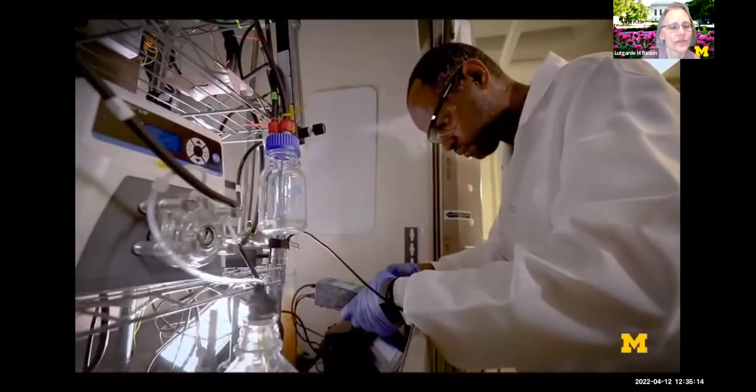We would release it back out to the environment. We started to realize that a lot of those wastes that we would release have valuable resources in them. Civil engineers and environmental engineers were designing a lot of those flows, and I think we have a big role to play in how we might continue to shift the mindset and think about the future of what those flows might look like.

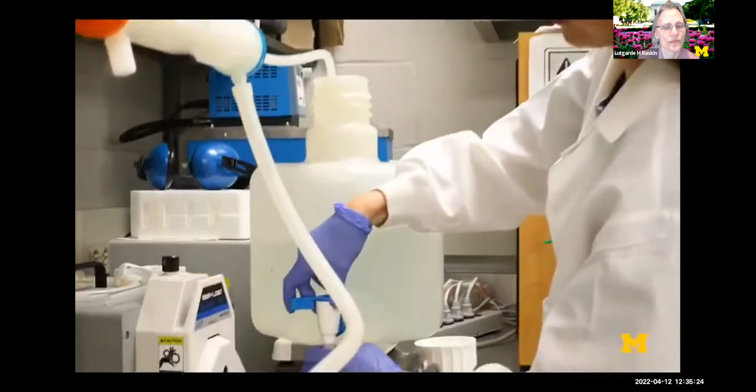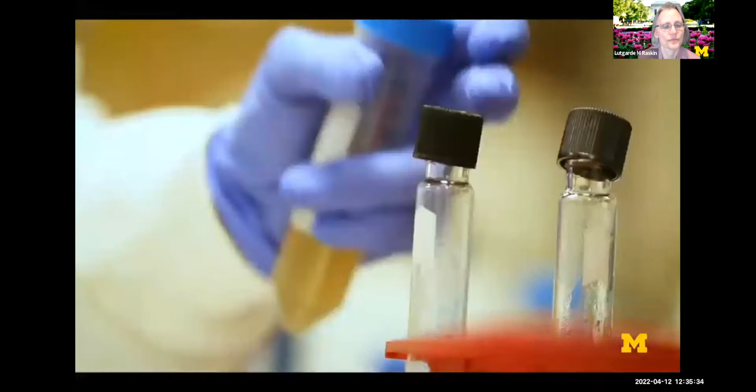One of the things I think we're doing that's really special is separating our wastewater right at the source, right at the toilet. The reason we're doing that is we can pull the nitrogen and the phosphorus out much easier before it's diluted in the wastewater, and then convert that nitrogen and phosphorus into really valuable fertilizer products.

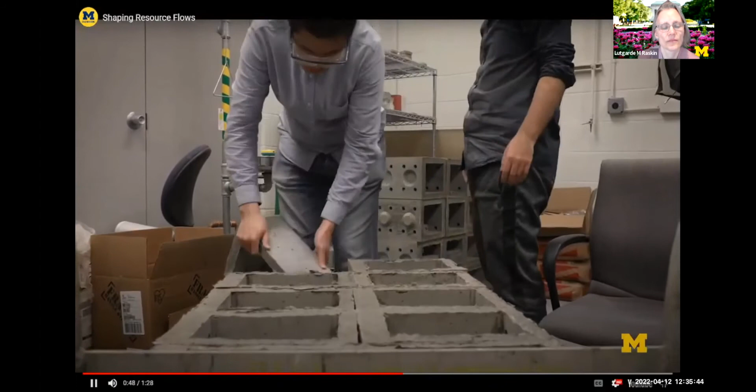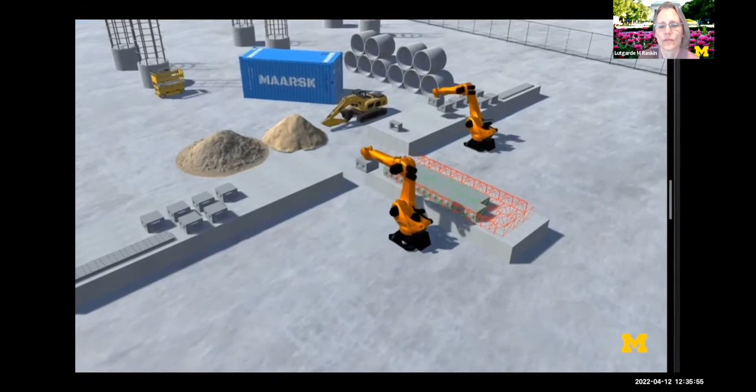Researchers in CEE are building RECO blocks. These are blocks built out of materials from carbon that's been sequestered, used to build structures. And then when the structures are done, rather than landfilling the material when we tear it down, we take those blocks and use them in new buildings, shaping the flows of these resources rather than a linear flow, making this a cyclical flow.

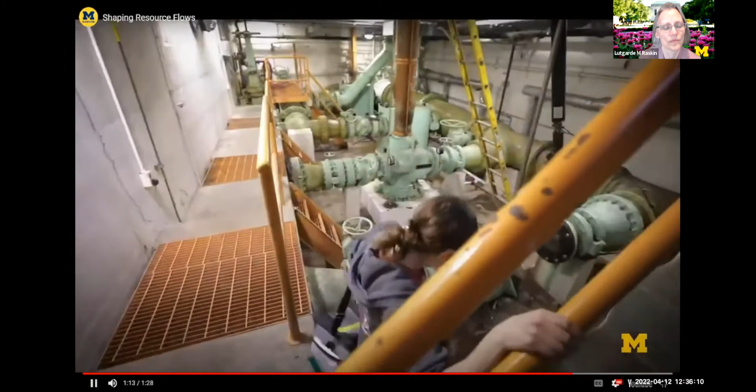In 50 years, if we're successful, this is just going to be in every activity we do as a civil and environmental engineer. How we're getting our resources, what we're doing with the resources, and where they go when we're done with them is going to be ingrained in our work.

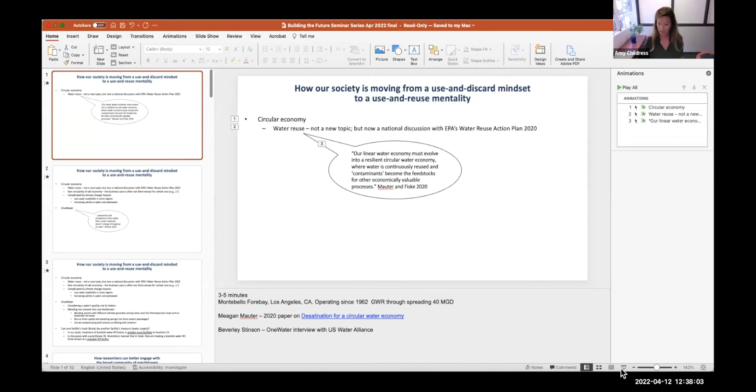Before I start the presentation, I was asked to address a couple of overriding concepts of this seminar series. The first is how our society is moving from a use and discard mindset to a use and reuse mentality, pertaining to the circular economy that's become a hot topic. Water reuse, though, is not a new topic. We've been doing it in the LA area since the 60s and other places as well. But it's now a national discussion, in part due to EPA's release of their water reuse action plan.

I have a quote here from Meagan Mauter, one of the panelists, that our linear water economy must evolve into a resilient circular water economy, where water is continuously reused and contaminants become the feedstocks for other economically valuable processes. So the contaminants we're going to talk about today are salt or salinity. A key thing I want to point out is that we're not there yet with circularity of the salt economy. A lot of that's because the business case for taking out salt and reusing it is often not there for something like sodium chloride from seawater. Maybe for certain ions we're getting closer, like lithium and other high value constituents.

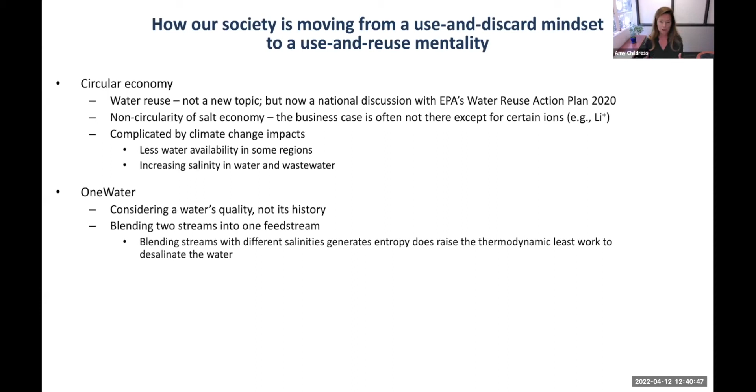We will be looking at blending two different feed streams into one, often two streams with different salinities. You might say, blending streams with different salinities, you're going to generate entropy and raise the thermodynamic least work to desalinate the water. How can that be good? But we hope to show there may be capital and operating savings and system advantages.

And when I say system, I don't mean a single facility, but our whole system of water use and reuse. You might ask, wouldn't we be contaminating the streams by blending, or contaminating one stream? But we might suggest we're diluting the other stream through the blending process.

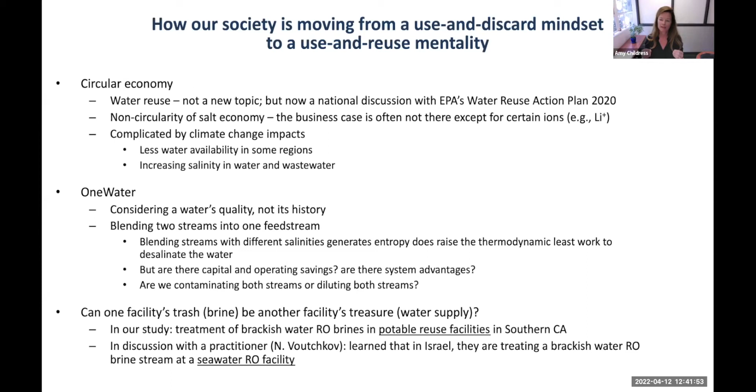Another concept: can one facility's trash or high salinity brine stream be another facility's treasure or water supply? In our study, we're going to look at the treatment of brackish water reverse osmosis brines at potable reuse facilities. I had a discussion recently with Nikolay Voutchkov, a practitioner, and learned that in Israel, at one location, they're treating a brackish water RO brine at a seawater RO facility. So there are lots of facilities mentioned there, but the key thing is these facilities are beginning to interact.

The next thought to expand on: how researchers can better engage with the broad community of practitioners. At USC, we're in the process of forming a water reuse and resource recovery center with a very specific goal of engaging and partnering with consultants and industrial partners.

We have some good ideas. I'm not going to share them today, but I'll go on.

A diverse team is needed to transition from problem solving at a local or regional level to translating solutions to other regions of the country or other parts of the world.

So one goal of our work is to contextualize and create a framework around blending that has been done. I would say in this case, we're the academics following what the practitioners have done. But we might ask, can the blending scenario that I mentioned in Israel be used to address similar challenges in Florida, Texas, or California, or elsewhere?

Another goal of our work is not just to follow what has been done, but also to hopefully propose some new scenarios and ways of integrating desalination with potable reuse. And that's the building the future part. All right, so with that, I will get started on the actual lecture seminar.

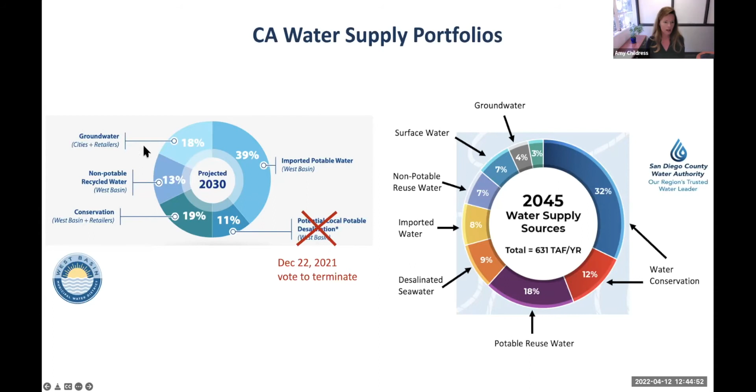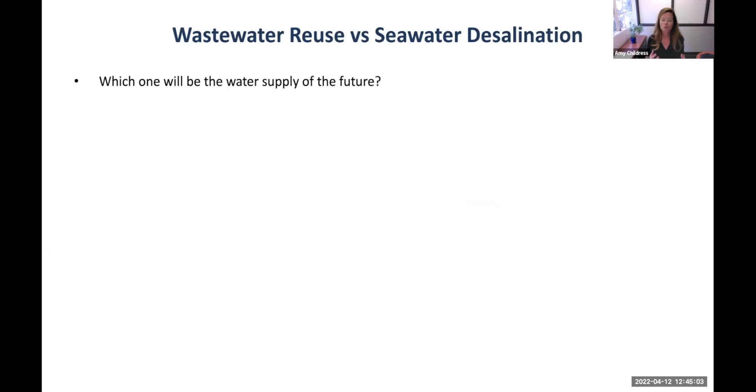So there's been kind of a long-standing water reuse, seawater desalination competition. Which one will be the water supply of the future? And there's, of course, technology considerations. There's public opinion that has political implications. And this is important because the water board or the water agencies are overseen by boards of directors, and these are elected officials. So public opinion counts.

There's also significant regulatory hurdles to both water reuse and desalination. In coastal regions, you might expect seawater desalination would win out, but if you also consider that the highest populations are along the coast, you have lots of wastewater available, and there's also a desire to stop discharging so much of our treated wastewater to the ocean. So there's still a competition there.

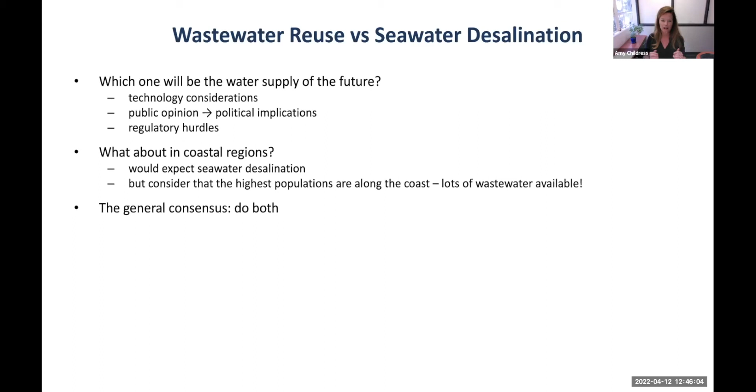The general consensus has been, of course, and as you saw in the portfolios, to do both of these. But I would say to do both in parallel. And what we are proposing is to see if there's maybe a way to do them both together.

So I'm going to turn those portfolios into some blocks. We still have imported water and surface and groundwater, but we're bringing in potable reuse and seawater desal. So you might say, hey, why is seawater desal at the base?

We know it's the most expensive water supply option. We think it is. We're still comparing to direct potable reuse, but in general, it's the more expensive water supply option. Do we want it in the base? But water agencies have to put it in the base to justify building these expensive facilities. We don't want facilities that can become stranded assets. So we say desal will be used as part of that base load. We will always use it.

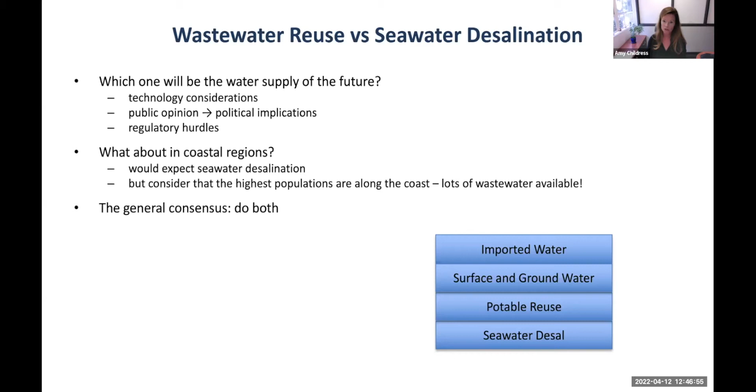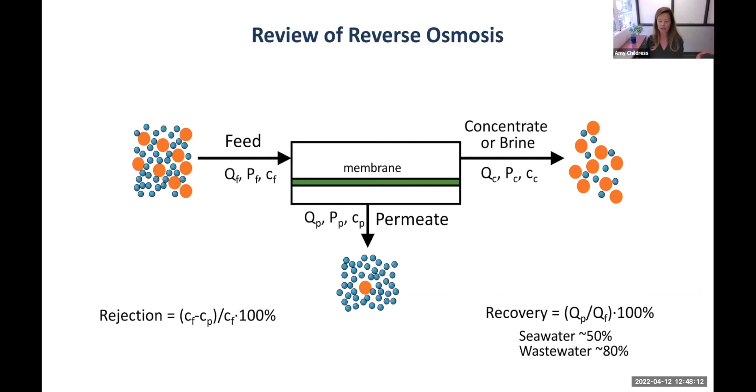And if you're looking at PFAS removal or something like that, rejection is important. I'll talk a little bit about recovery today, and that's how much permeate we take from the feed that's entered, how much product water we recover from the system. For seawater, that amounts usually to about 50%, while when we're taking treated wastewater and sending it through a potable reuse facility, we are looking at RO that more often has more like 80% recovery.

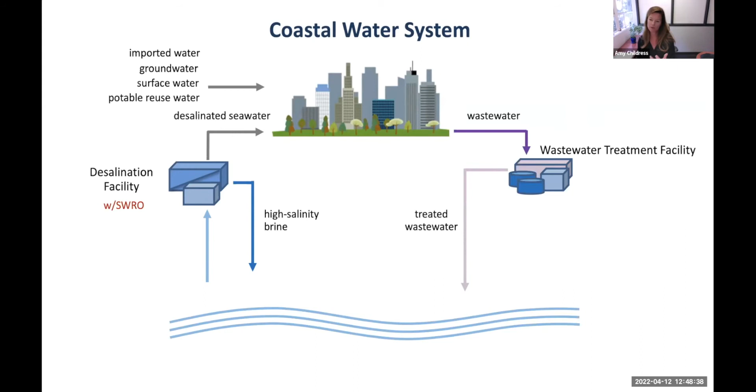Okay, so here's our coastal water system that's fed in part by a seawater desalination facility. Seawater comes in, desalinated seawater makes up part of the water supply, and a high salinity brine stream is discharged back to the ocean. We have our other sources, and on the other side, we have the wastewater coming out to a wastewater treatment facility.

Traditionally, in the past, we've sent all of the treated wastewater to the ocean. Now we might pull off a portion and treat it, maybe through filtration or something, for non-potable reuse. And we might take another portion and either treat it on site if there's enough footprint available, or send it to a neighboring advanced water purification facility where we're treating it for potable reuse.

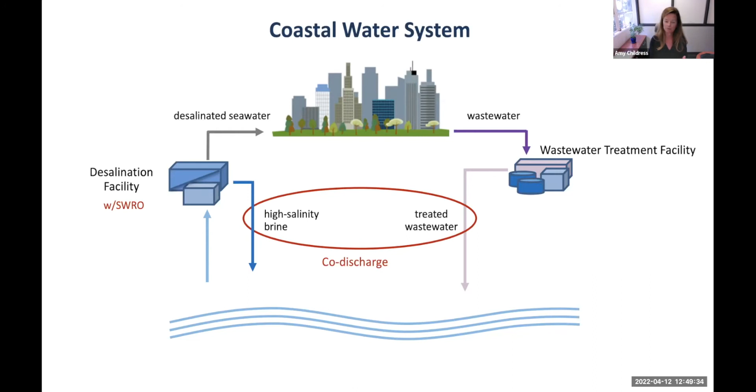We asked, can we achieve these brine discharge regulations somehow without wasting the water resource? Because that's a waste of the water resource in the treated wastewater.

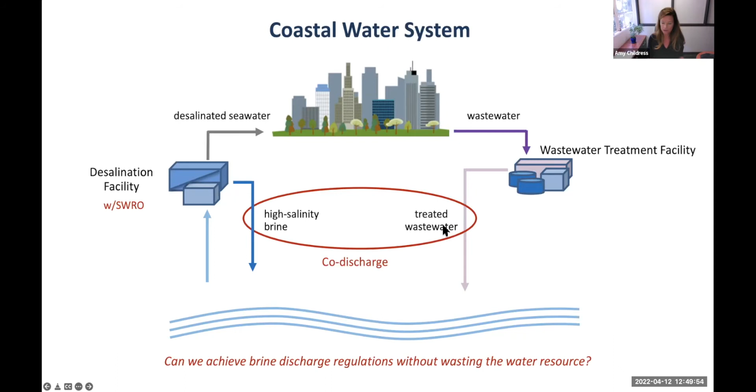So study number one was two scenarios: a co-discharge scenario. That's what I just showed you. So we have the seawater coming in, the brine stream coming out that we're blended with the treated wastewater. Just to give you a ballpark, seawater we're approximating at 35 grams per liter, and we're going to set a typical standard, just something in the ballpark of 40 grams per liter.

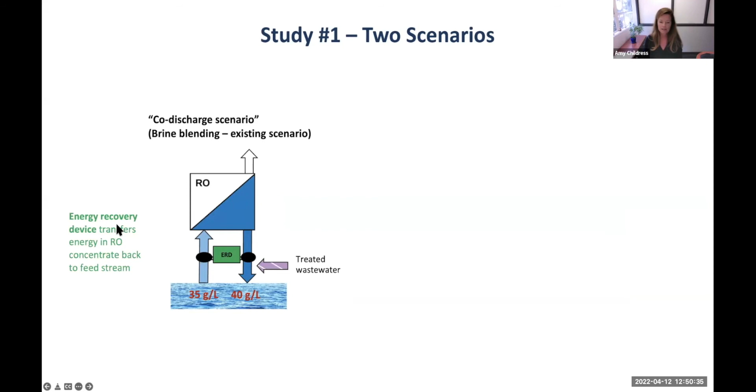And you'll notice that we're using an energy recovery device. These devices are typically used in seawater RO facilities, and they transfer the energy that's left in that RO concentrate back to the feed stream. So they reduce the high pressure requirements that are needed on this side.

We're going to compare that with what I'll call a potable reuse scenario. This does not exist now. It's a proposed future scenario where, instead of doing brine blending, we're proposing feed blending. So we're bringing that treated wastewater in on the upstream side. We do account for some advanced processes that would be needed, and we're proposing then to blend that treated wastewater with our intake seawater.

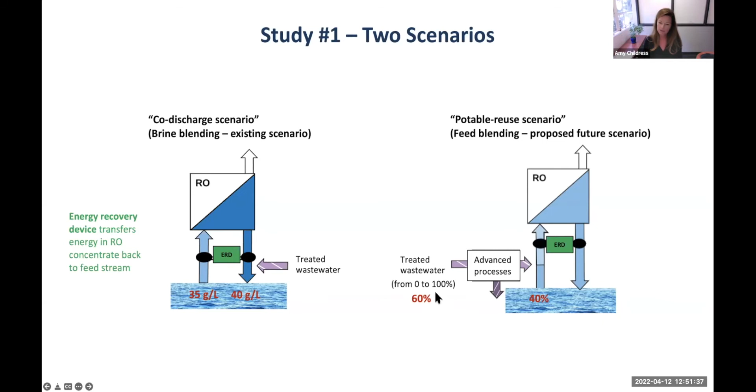And we looked at blends from 0 to 100%. 0 would be just a full seawater RO facility. 100% would be just a wastewater reclamation facility. But really, we were interested in the blends in between those. So the blend that I'm going to show you some results for was a 60% treated wastewater, 40% seawater blend.

This is snapshot results for those two scenarios. Here we're looking at flow rates for the two scenarios: the brine blending scenario, 100% seawater, no wastewater in the influent, and the potable reuse scenario, which was 40% seawater, 60% wastewater in the influent.

So the things that we can see immediately are: in the potable reuse scenario, we need a lot less seawater. That means less seawater intake infrastructure. That's a big deal, cost-wise and for the environment.

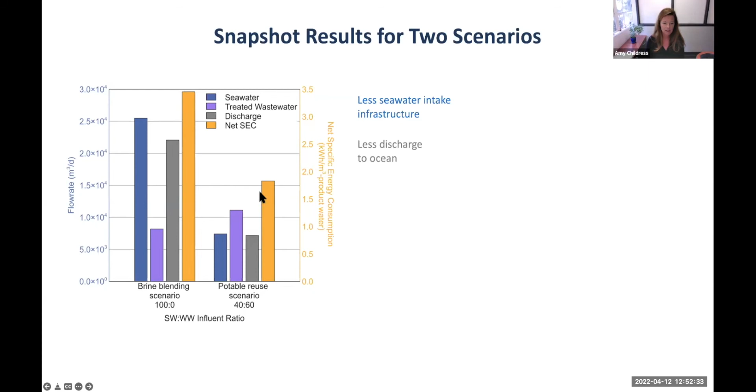If we look at the gray bar, we see that with the potable reuse scenario, we're discharging less water. So that's less discharge to the ocean. And if we look at the yellow bar, which is net specific energy consumption, we see the potable reuse scenario has a reduced energy requirement.

That's in large part due to the fact that, because of the blending, we wouldn't need a second pass RO for boron removal. Normally for boron removal, we take the permeate from a first RO train and send that to a second RO train to get a high enough boron removal. But if we're blending these streams, we can get that savings—a significant energy savings.

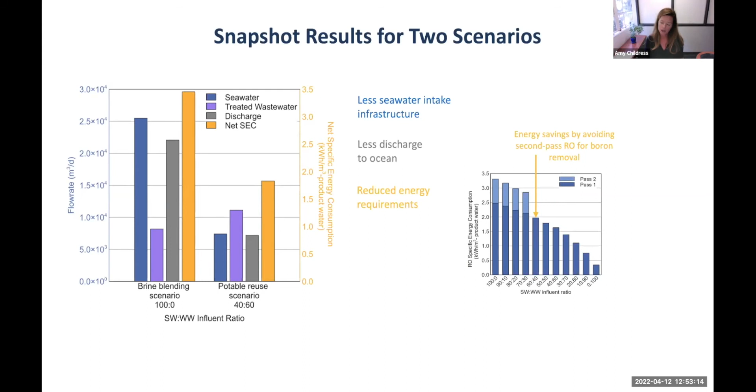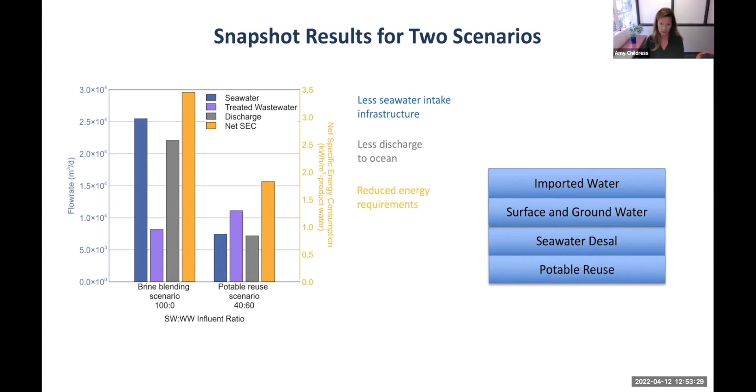So where this took us was: we should move potable reuse into the base. There's so many reasons that potable reuse has benefits over seawater desal. So let's move that into the base.

But if we go back and look at the treated wastewater flow rate as a function of the ratio—remember I said we went from 100 to 0—so this is 100% seawater.

This is 100% wastewater, and we picked the 40/60 blend because it was where we no longer were doing discharge dilution. Operating below that would be wasting that water resource just by blending it for discharge. So we wanted to operate outside of that, but still meet discharge requirements. We did it with influent dilution at 40/60.

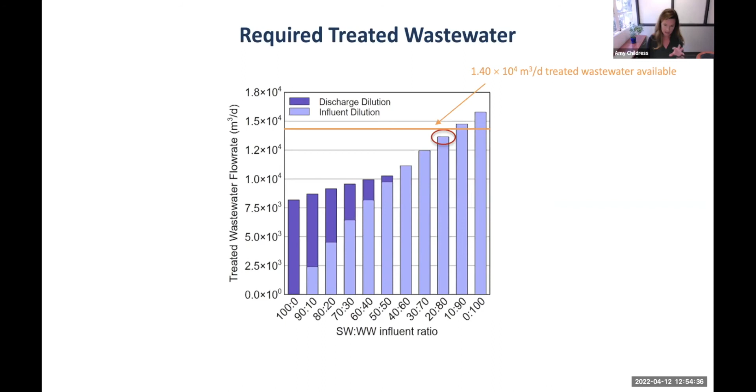But if we step back and consider the benefits of potable reuse or using the treated wastewater, we might ask how much treated wastewater is available, and why not operate in a 20% seawater, 80% wastewater scenario. It was at this time that we realized our paradigm was changing from wastewater-augmented seawater desalination to more of a seawater-augmented potable reuse. I'll come back to that topic.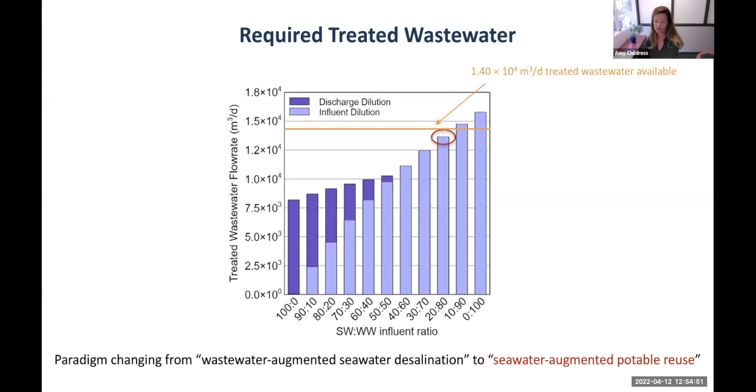But before I do, I want to go back to our blocks. If we can minimize the seawater desal, we can address some of the brine discharge concerns. We can reduce the seawater intake, and we can reduce some of the energy consumption.

But we still have seawater desal down towards the base, so we're not addressing the demand risk. That's if less expensive water supply options become available, then our demand for seawater desal would decrease. It's the concern of having a stranded asset, a mothballed seawater desalination facility.

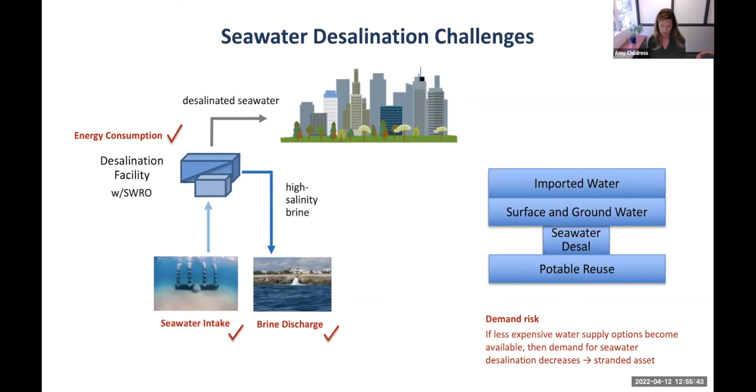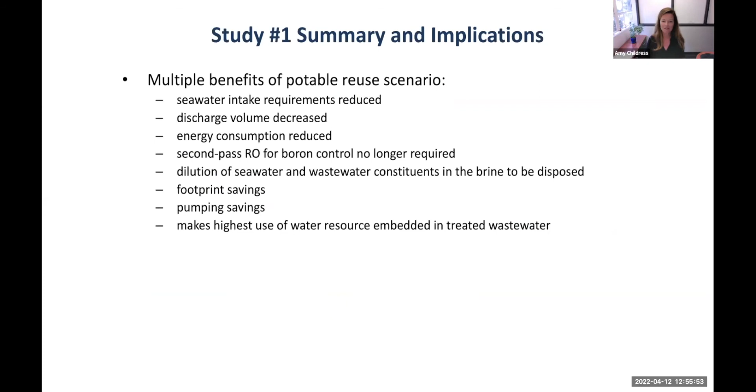So before I address that, let me go forward with our summary from study 1. I hope I showed there are multiple benefits of the potable reuse scenario. We still left this with: how can we protect seawater desalination from demand risk? And is there enough wastewater available to meet potable reuse demand, or are other sources available? I'm going to touch on this one first, and then come back at the very end to the other.

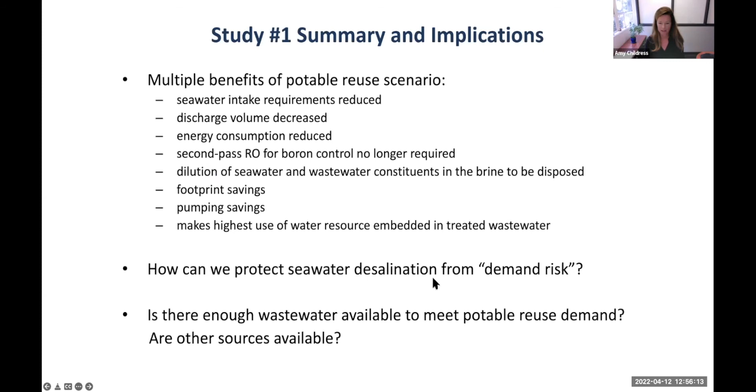This leads us to study 2, where we step back and look at potable reuse of reclaimed wastewater with increasing salinity. Now we're not looking at seawater RO, we're looking at a wastewater reclamation facility followed by an advanced water purification facility with an RO process. We have our wastewater influent coming in.

The salinity has been increasing in wastewater. This is due to residential water treatment systems, industrial uses, and water conservation, and our existing reverse osmosis has been accommodating that additional salinity. Not only that, but seawater inflow and infiltration — there can be leaky gates or corroded infrastructure, and if you have a facility in a low-lying area, seawater can intrude and mix with that influent wastewater, also contributing to increasing salinity. The key is that both of these are exacerbated by climate change, sea level rise, and more water conservation.

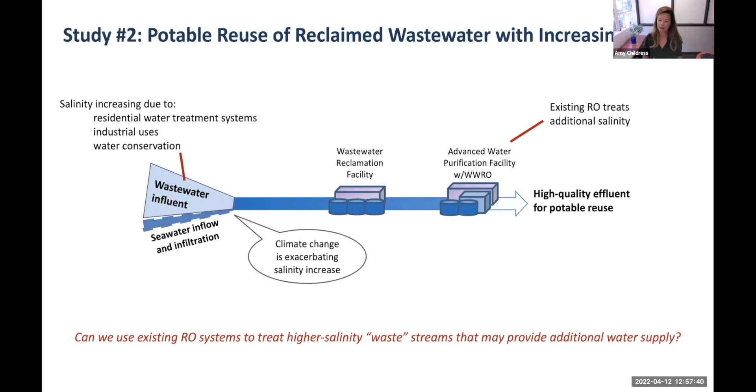So our first question was: can we use our existing RO systems to treat higher salinity waste streams that could provide additional supply?

The first thing we considered was that you may have a regional brine interceptor that collects and conveys brines from desalters or concentrated waste streams. Right now, those may be treated in a wastewater reclamation facility and discharged to the ocean. Could we instead treat those for reuse?

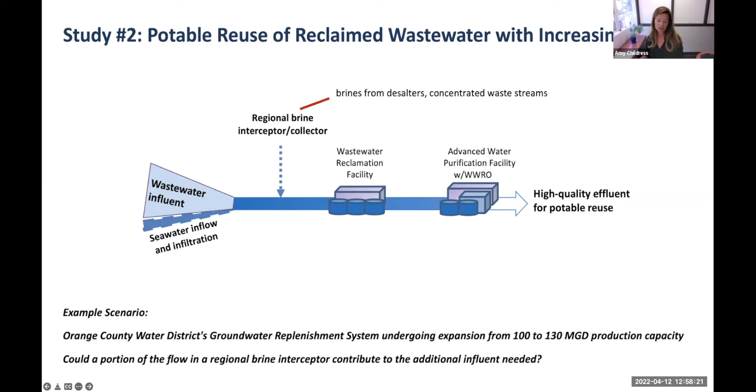An example scenario of this is Orange County Water District's groundwater replenishment system. They're expanding from 100 to 130 MGD. Could a portion of flow in a regional brine interceptor give them additional effluent or influent that's needed?

We also considered brackish water reverse osmosis brines. Could we put those upstream or downstream of the wastewater reclamation facility? This does happen in a few cases, but it is certainly not industry standard. Instead, in inland regions, these brackish water RO brines are typically discharged to disposal wells or evaporation ponds, where we lose that water resource. So if we can recover these flows by blending and desalinating them, what would the energy implications be?

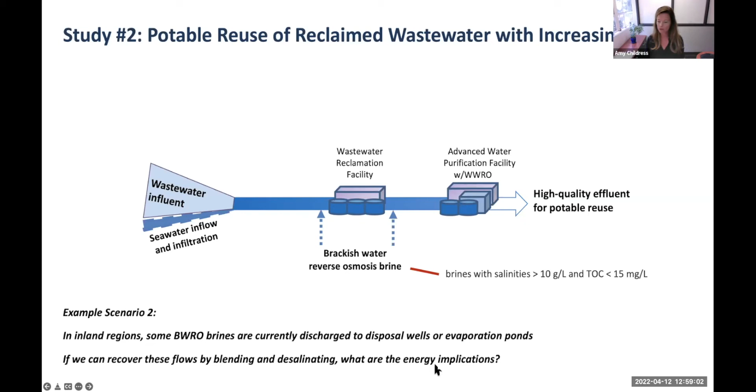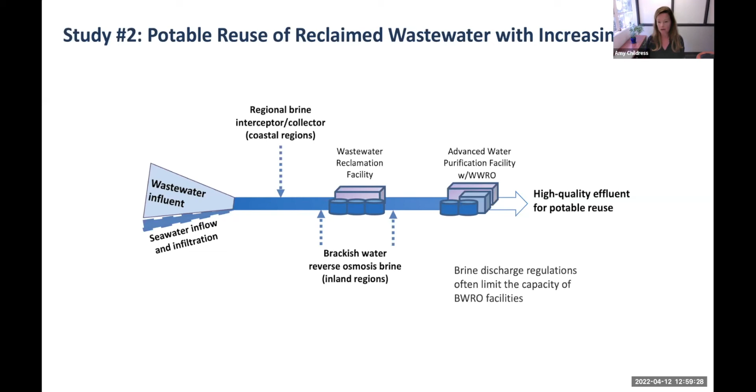Before combining those two, I'll also say that both of these are often limited. The capacity of brackish water RO facilities is limited by brine discharge regulations. So if we can find something better to do with that brine, we might have more capacity available at our brackish water RO facilities. Combining both of these and refining our question: can these higher salinity streams be treated at no additional energy cost, using devices or processes typically not implemented at advanced water purification facilities?

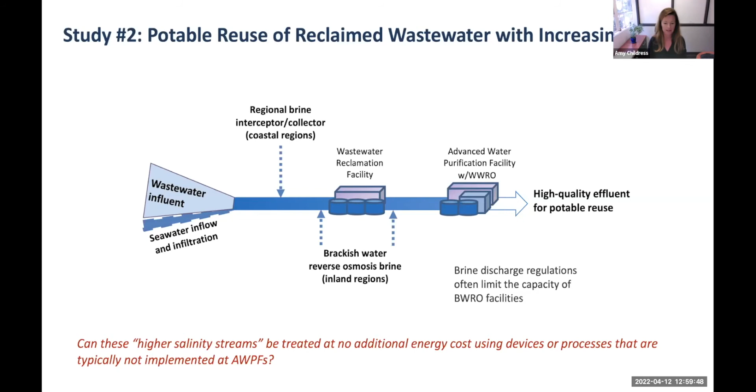The RO systems we considered used a 2-stage RO — pretty standard for brackish water RO or wastewater RO — treating the concentrate from the first stage in the second stage. By doing this staging, we can decrease the irreversible work, or the energy that's lost in the process.

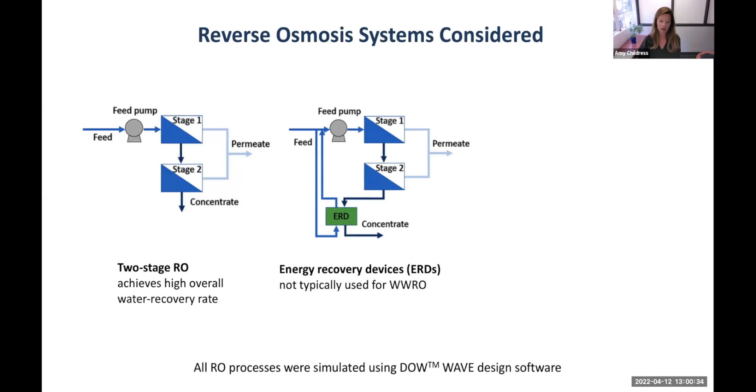We also looked at using an energy recovery device. You saw the energy recovery device earlier, but that was for seawater RO. ERDs are industry standard for seawater applications, but they're typically not used for wastewater or brackish water RO applications. So we looked at the possibility of using an energy recovery device.

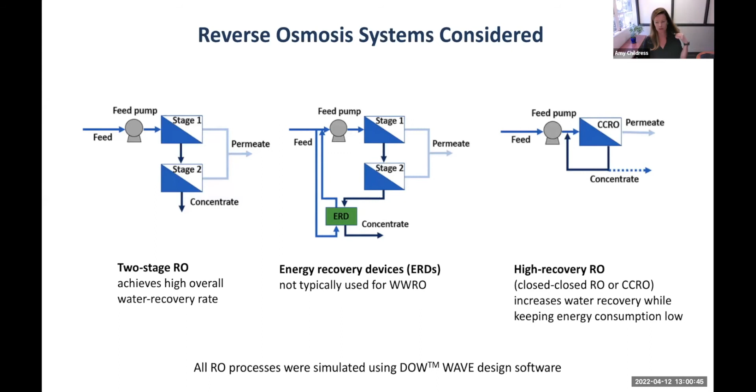We also looked at using high recovery RO. I'm not going to include those results today, just to keep it streamlined.

This is the framework we put together. I'll point out a few key things. We have the wastewater coming in, and we have seawater intruding in. We looked at 0, 2.5, 5, 7.5, and 10%. And then we looked at the possibility of bringing in the higher salinity streams, so that would be 5.7, 7.5, 10.9, and 17.5 grams per liter.

This combined stream went to an advanced water purification facility. We're trying to have water for potable reuse that meets certain salinity requirements, and we're also discharging a stream that also has regulatory requirements on it.

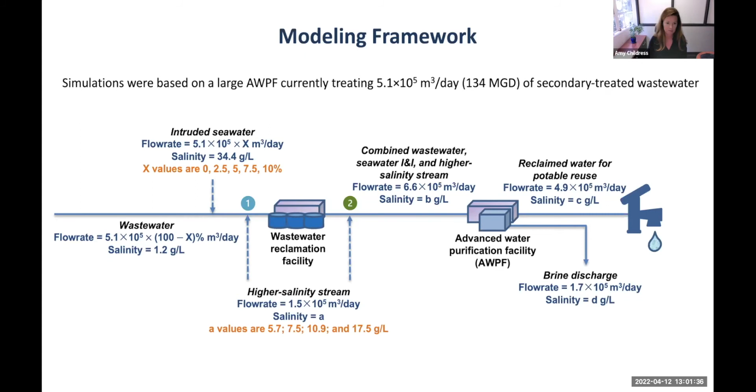So here are some of the results. You're looking at the specific energy consumption, the net specific energy consumption, for the 5 seawater intrusion scenarios - 0, 2.5, 5, up to 10% seawater intrusion. We'll just take one of these example scenarios.

The yellow represents we're bringing in the regional brine interceptor. The next bar up is brine 1, brine 2, and brine 3. The black dots are the influent salinity, so we can see that we're going in the direction of influent salinity.

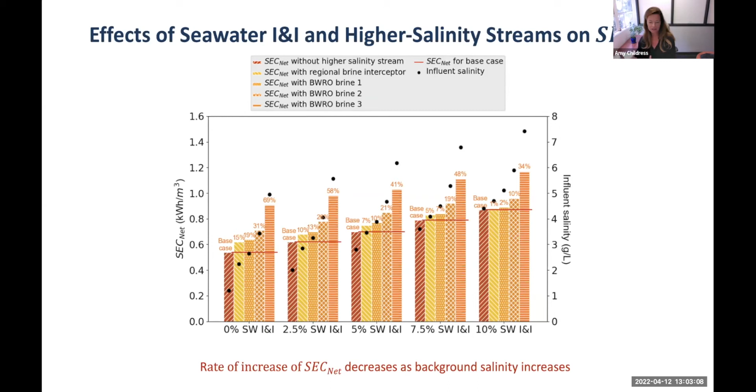If we compare the base case - this first bar and the red line - we see that if we bring in brine 3 to this 0% seawater intrusion case, we have a 69% increase in energy required. Whereas if we look at the 10% case, so our background salinity has increased, we see that the percent increase for brine 3 is only 34%. This is interesting because it means as our salinities come closer, the rate of increase of SEC net decreases, so in time, perhaps higher salinity streams won't seem so much higher.

Now, these results - all you're doing is looking at this bar, it's the bar you just saw. So the left-hand bars are the bars we were just looking at. The right-hand bar next to them is if we are using an energy recovery device. So now we can look at the energy savings if we implement an energy recovery device - that's the difference between the bars.

The thing to note is that in the lower background salinity case, we see that the second bar is above this base case, which means the ERD can only partially compensate for the additional energy required.

But if we look at the higher background salinity case, where the second bar representing the ERD results is lower than this base case line, we can see that we can fully compensate just by implementing an ERD - fully compensate for the additional energy required. Of course, you have to weigh the capital cost and perhaps a slightly additional complexity of using an ERD.

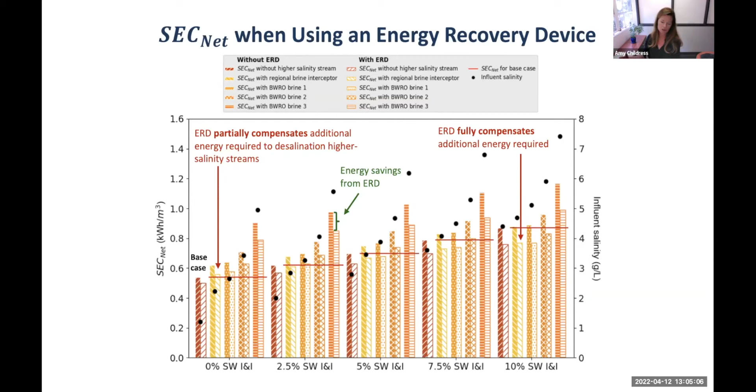I should note here that it's not just TDS or salinity and specific energy consumption that are important considerations with bringing in these brine streams. We also have scaling, and we did look at scaling potential in the paper I'll give you the link to at the end. In some cases that may limit how much of a brine stream you can use. But from the perspective of treating that brine, there's significant benefit with blending it with the treated wastewater, because then you have less scaling potential than if you were just treating that brine stream alone.

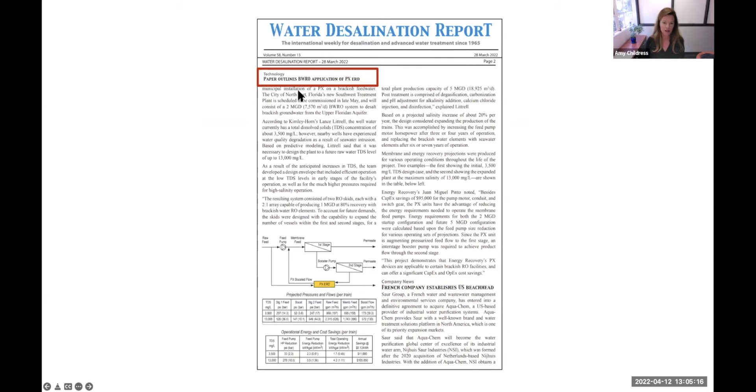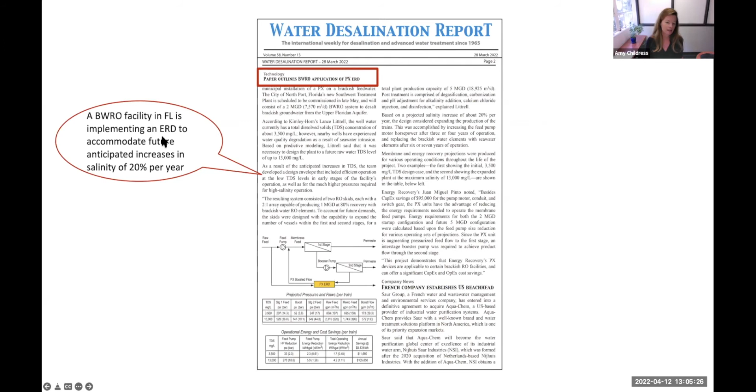Interestingly, Tom Pankratz, in his water desalination report at the end of March, called out a facility - a brackish water RO facility in Florida - that's implementing this for the first time, this ERD. They're trying to accommodate future anticipated increases in salinity of 20% per year, and they project significant cost savings with using an ERD. The reason this is important is just to show that accommodating these salinity increases is important.

This is not an example of different facilities combining streams, but we were excited to see kind of similar results, because brackish water RO facilities, like wastewater RO facilities, don't typically use energy recovery devices.

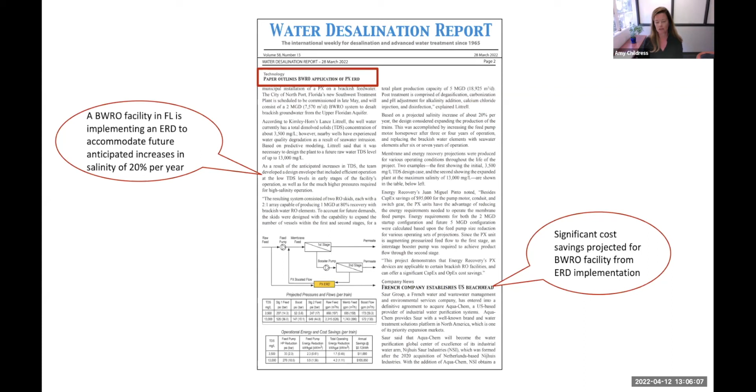And as promised, I'm returning to the future of seawater augmented potable reuse.

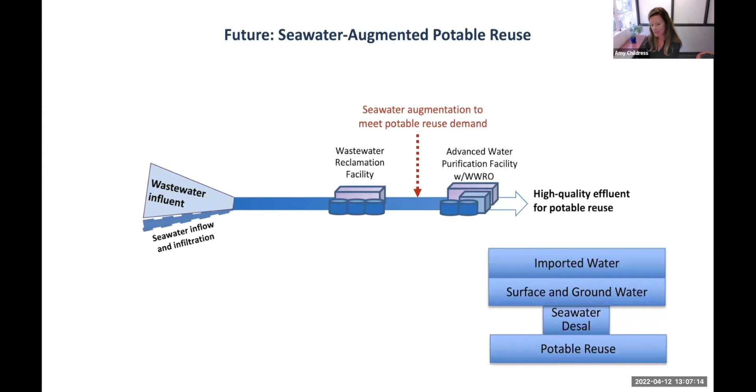The most important part is, in doing this, we can take that seawater desal block and move it up into more of a peaker position, because now we're not relying on new desal infrastructure that could become a stranded asset. Instead, we're using our existing infrastructure, or modifying it, to do this as needed.

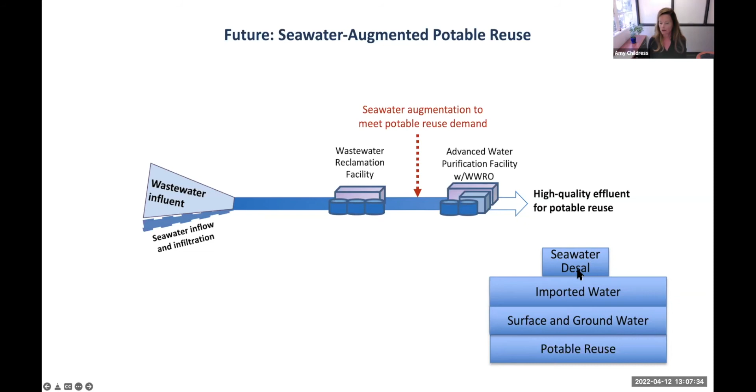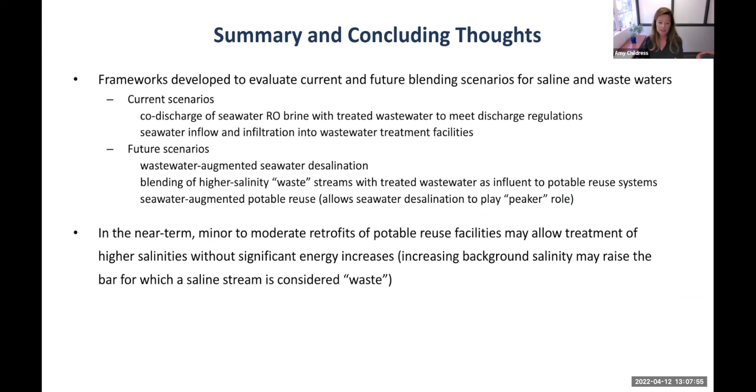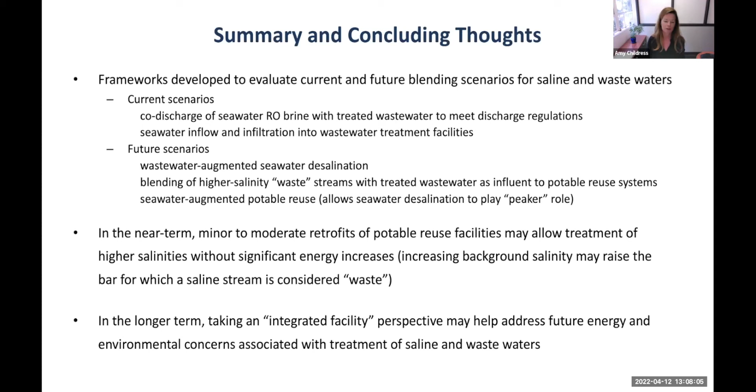So, summary and concluding thoughts. Frameworks were developed to evaluate current and future blending scenarios for saline and wastewaters. In the near term, minor to moderate retrofits of potable reuse facilities can allow treatment of these higher salinities without significant energy increase. But in the longer term, taking an integrated facility perspective can help address future energy and environmental concerns.